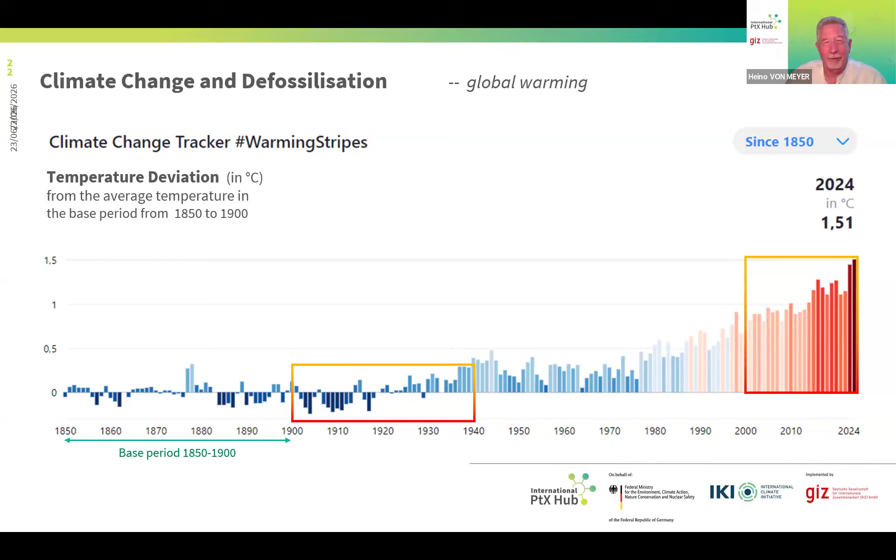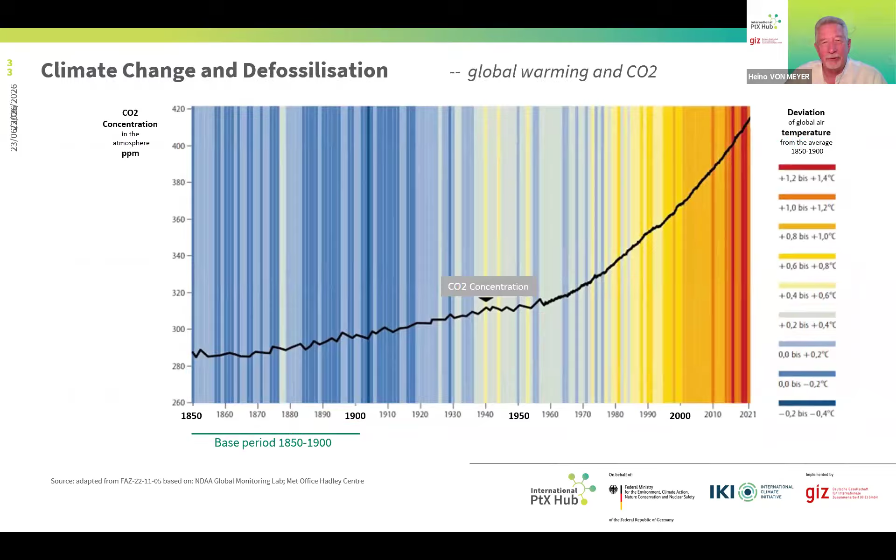clearly exceed this. We currently have unusual temperatures all over Europe. In Berlin, currently close to 35 degrees. So it's very unusual for our areas. And in France, they will have records today with more than 40 degrees. So that's the background. Obviously, this is correlated with an increasing concentration of CO2 in the atmosphere. And that's what we have to fight.

Let's look at which sectors contribute how much to the CO2 emissions. You see electricity and heat, so the power sector, industry and buildings. And transport is about a fifth, 22%. And the transport sector, if you split this up, then clearly road transport, cars and trucks, that's the main part. But aviation and shipping are in the order of 2.5 or 2.2%. You may say, oh, well, this is marginal. Well, 2.2% is equivalent to what the German emissions are. So it's worth addressing this. And therefore, let's look deeper into the maritime sector and shipping.

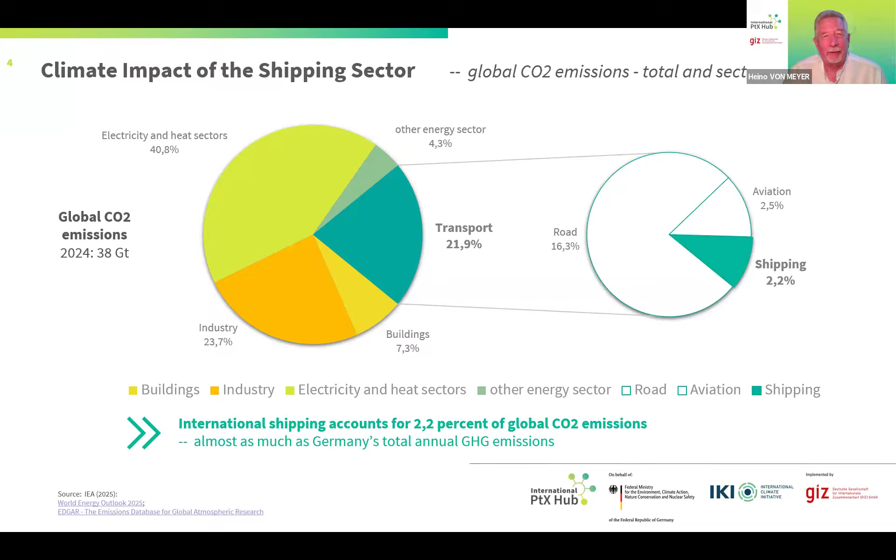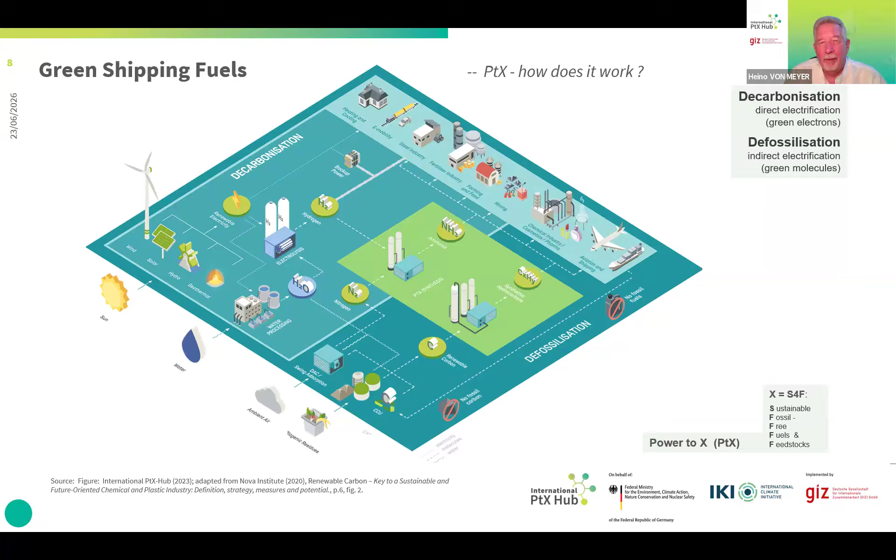Or the alternative is to combine the hydrogen with carbon and produce hydrocarbons. Now you will say, oh God, we wanted to get rid of carbon. Now you reintroduce carbon. So what's important is that this carbon stems from non-fossil renewable sources. You can think of direct air capture, but unfortunately, this is still very expensive and not yet fully ready. But biogenic residues are an option, and Argentina clearly is a country that probably has enough biogenic residues to provide renewable carbon. So that's also why we at the PtX Hub don't say decarbonization, but defossilization, because in the energy transition we will continue to need carbon, but it must be from non-fossil sources. Okay?

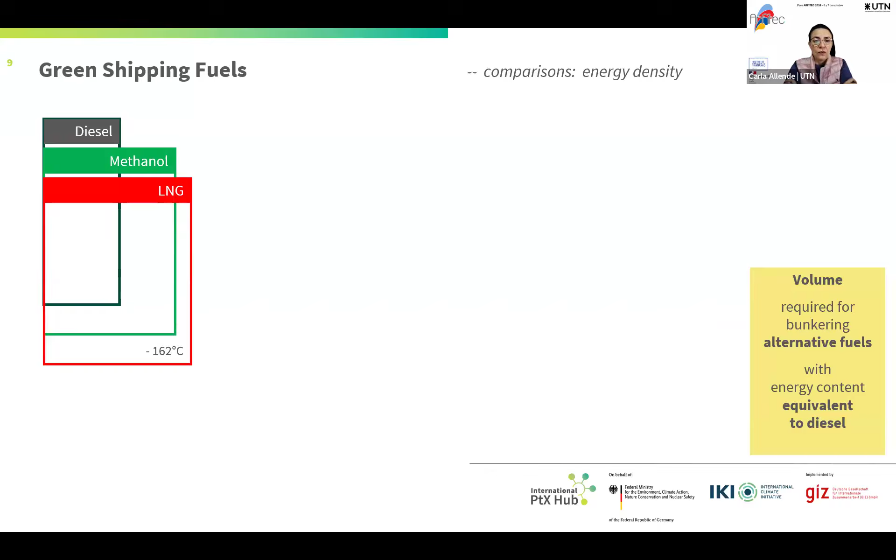Now, let's come to the shipping fuel side of it. If this is what you need in terms of volume for a diesel tank on your ship, if you go to methanol, you already need a tank that's almost twice as big. For LNG, that's currently used on many ships, you have to cool it down to minus 160 degrees Celsius. For ammonia, you also have to cool it down, but only to minus 34. But liquid hydrogen, if you liquefy the hydrogen in order to have it as a fuel, you need to cool it down to minus 250 degrees.

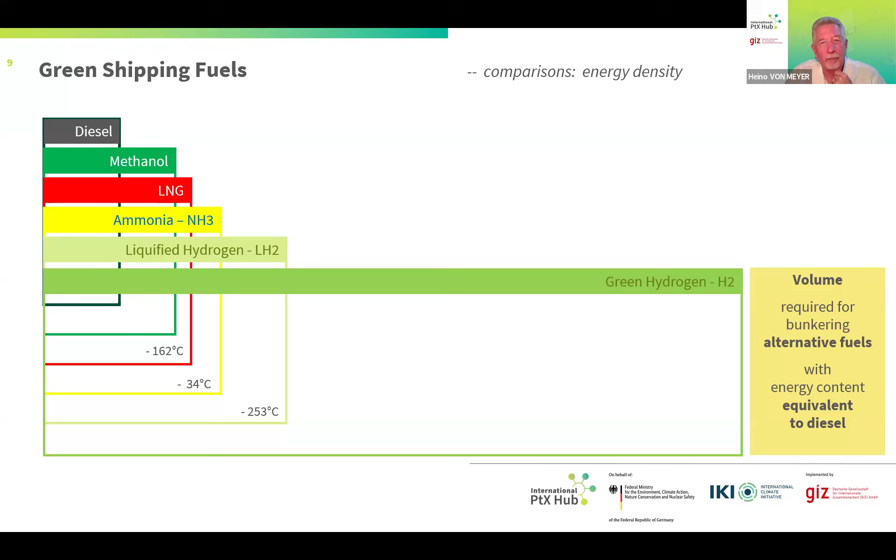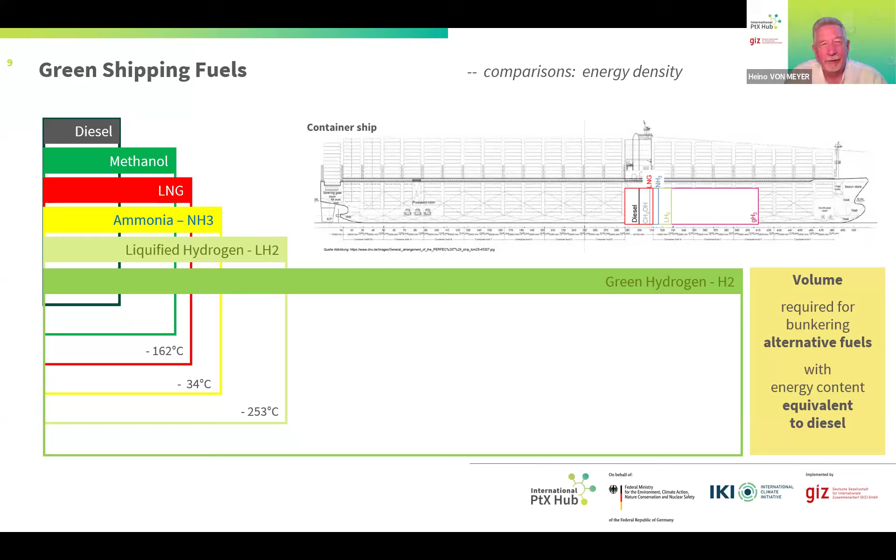And if you would try to use the hydrogen straight, then that's the volume needed. So 8 times or even more of what you need for a diesel tank. So in a ship, you see the diesel tank, and if you would have pure hydrogen, then you would lose a lot of your space for containers, etc. So basically, realistically, the choice is between methanol and ammonia.

Now, I will not go through all the different aspects comparing the different fuels, but as I already said, temperature for the liquid storage minus 250 degrees. For methanol, it is like with diesel, you can use it at ambient temperatures. Therefore, the compatibility with bunkering infrastructure in ports is rather or still low for hydrogen and e-ammonia. With methanol, that looks better. And I've talked about the storage size. It's 4 times, if it's liquid hydrogen, the amount you need for e-diesel.

The carbon sources are already mentioned. For hydrogen and ammonia, you don't need carbon sources, but for e-methanol and, for example, in some African countries who have high potentials for power to X because they have wind and sun, like Namibia or Mauritania, they have great difficulties to find carbon sources to match with the hydrogen. To some extent, I guess also Chile has that problem. A lot of wind and sun, but not so easy access to carbon sources. Brazil obviously has lots of carbon sources.

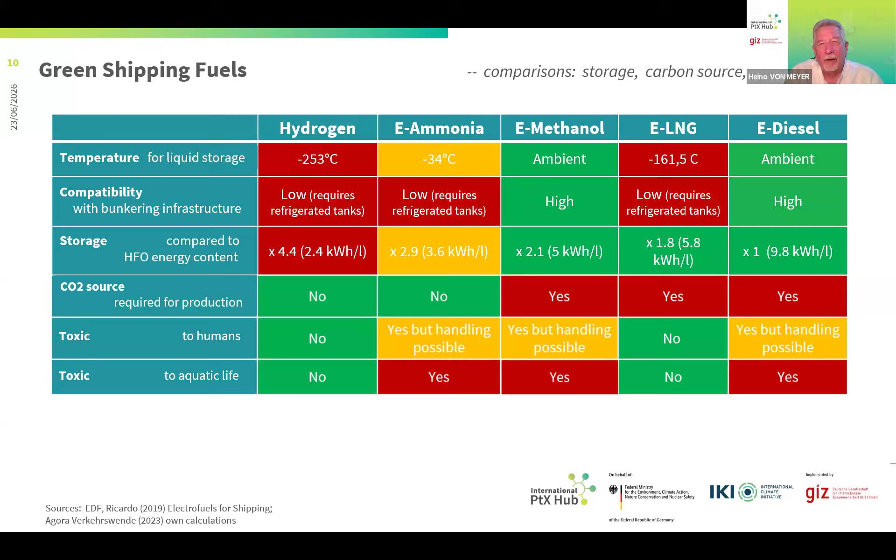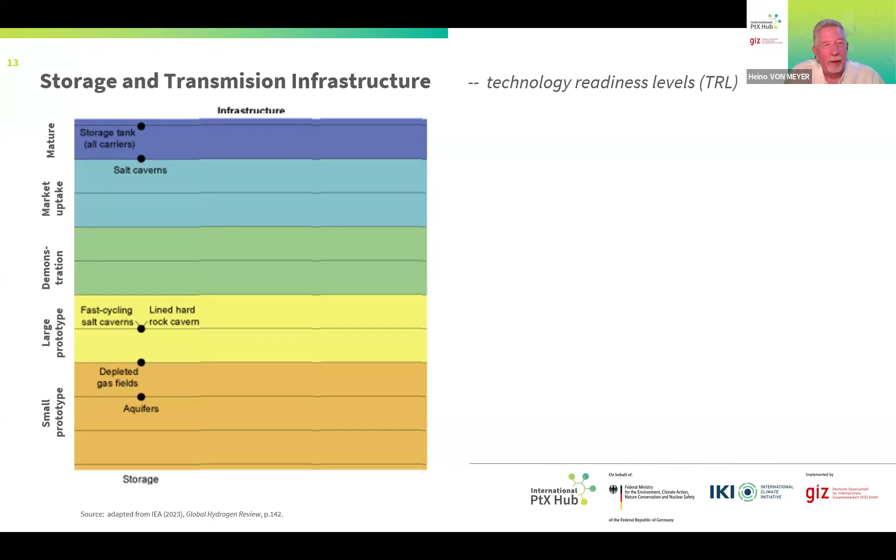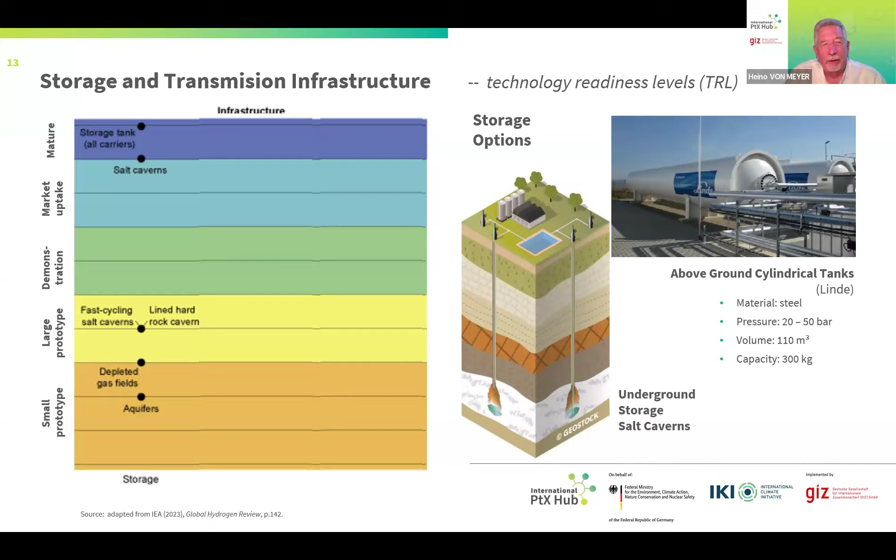Now, just a quick look at the infrastructure needs and how developed the technologies are. So the technology readiness levels here for storage. Storage tanks are already used, and for salt caverns, there are examples, but obviously not in every place. When it comes to more sophisticated storage in rock caverns or in depleted gas fields, etc., we're still at an early stage of technology development.

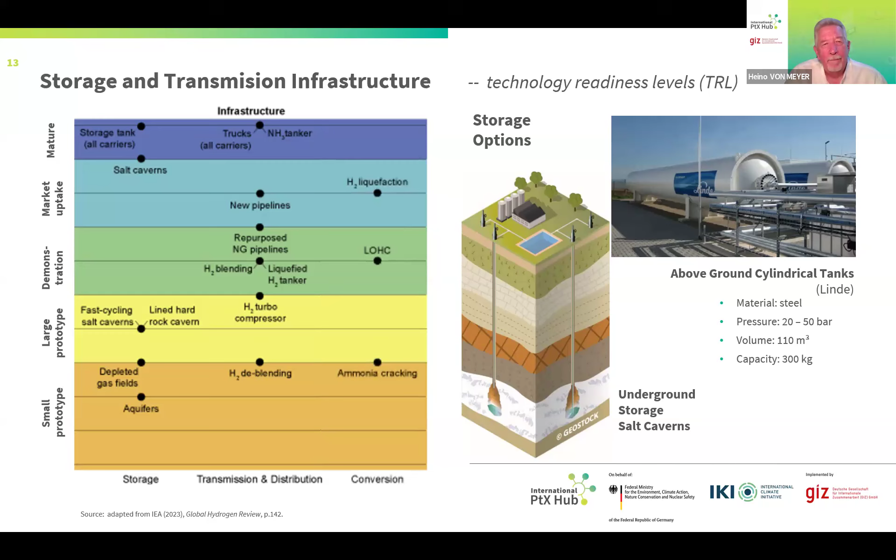For the transmission and distribution, trucks and ammonia tankers, they exist and are used. New pipelines, no problem, although hydrogen in pipelines requires higher standards. The repurposing of existing pipelines, therefore, is an issue because the hydrogen likes to escape. So, with that, that's just a quick overview on the technology readiness.

Let's have a look at the costs of transport. Now, for large amounts, these retrofitted or new pipelines are the cheapest options. You see the scale of prices here from below 10 dollar cents, and it goes up to more than $2 per kilo. Or if it's smaller amounts, the cheaper option is to go by truck.

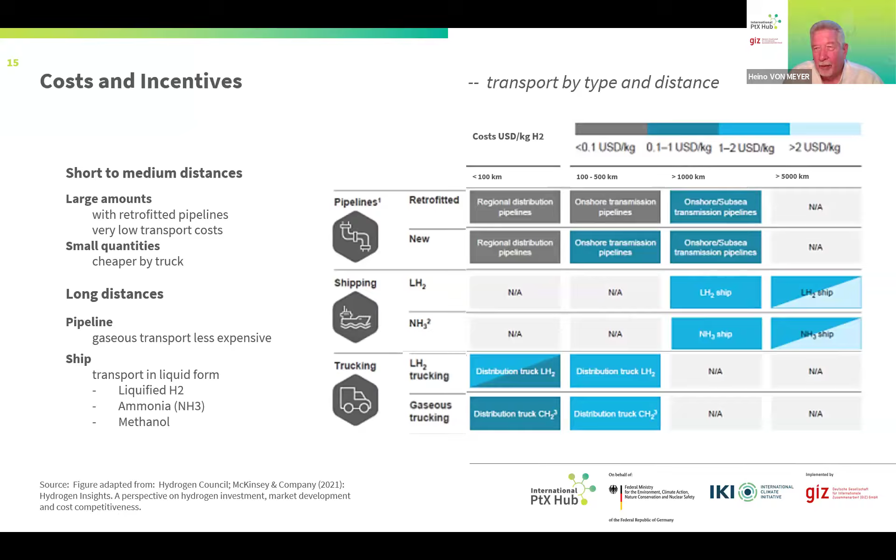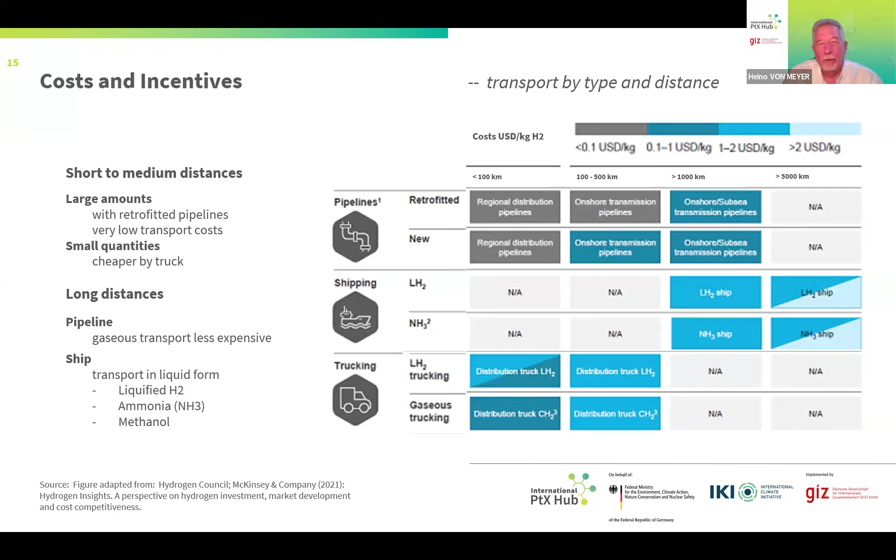For long distances, so distances beyond 1,000 kilometers or more, pipelines are an option, but probably not for Argentina. I mean, that's more the case for the Northern African countries, Morocco, Algeria, who have pipelines to Europe, and there are big discussions and projects to maybe connect North Africa with Europe on that. And the solution here is therefore shipping. Shipping either as liquefied hydrogen or ammonia, or it's not in this graphic, but also methanol. So it's a cost issue that changes with the distances to transport.

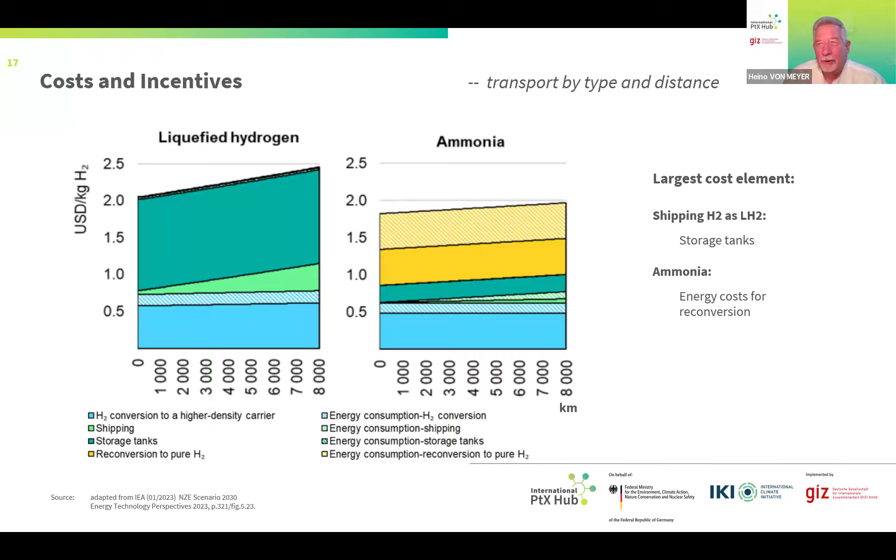I'm jumping into a different topic, and that is the costs and the incentives, because we will clearly see cost disadvantages for the new and alternative fuels, and therefore incentive mechanisms have been developed to bridge the gap between the supply price and the willingness to pay by off-takers. And the most famous one is currently H2Global, which is funded by the German Economic Ministry. And it works like this. There is a procurement auction where consortia can apply and offer a supply price for a 10-year period.

That's pretty long, but for investors, they would love to see 20 to 30 years security. But at least that's a first step. On the other side, you have a so-called offtake auction where the industries and transport sectors that want to buy PtX products or hydrogen can offer their willingness to pay, or off-taker price offers. And in the auction, the best options on both sides will be identified. And for sure, there will still be a price differential. And that will be covered with public money in the H2Global scheme.

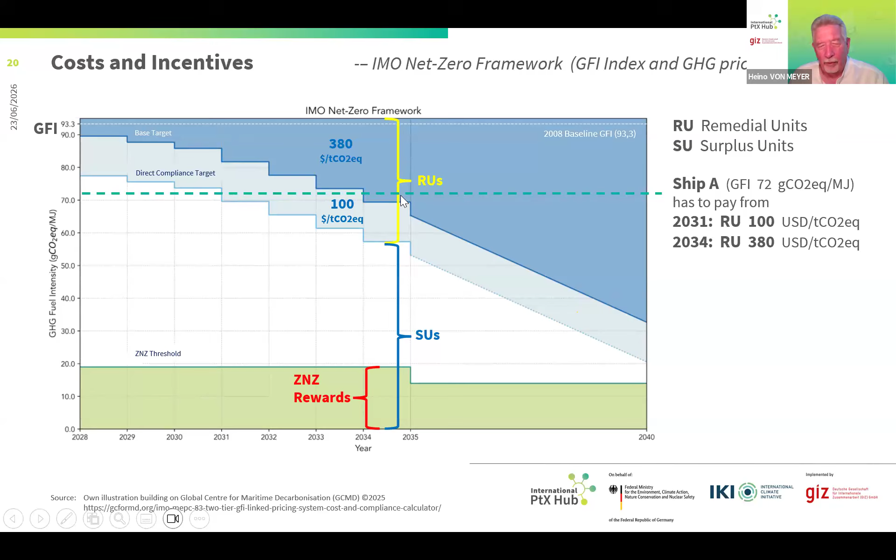So just to give an example, a ship that has a fuel intensity of 72: from 2031 on, they get into this gray area, they would have to pay 100, and from 2034 on, they would have to pay 380. Another ship can receive surplus units and can bank them for 2 years, or transfer and sell them to others who don't reach the thresholds.

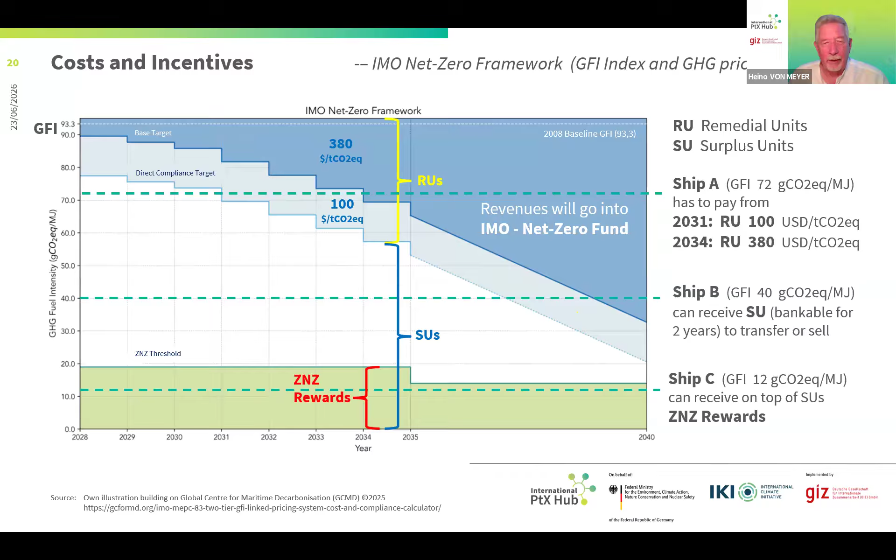And a modern green ammonia or methanol ship with a low fuel intensity can even get these rewards. Maybe a bit complicated, but that's interesting to look at because it would generate approximately 15 to 16 billion euros annually, and that's quite significant.

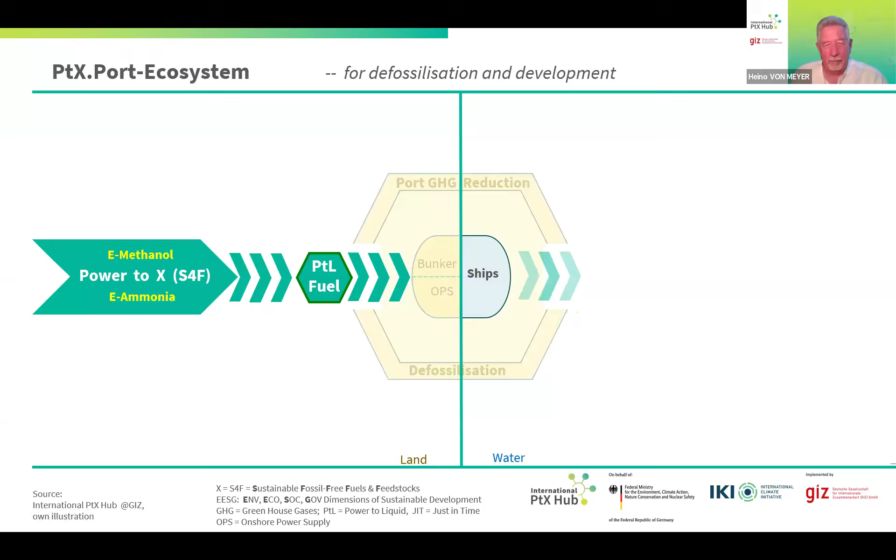Okay, I think I have to speed up a bit because I want to really get to the port story. This quickly, and you have probably seen this already, our EESG framework with the 4 dimensions and all the topics that should and need to be addressed. Now, what I want to show here is that the transformation of infrastructure and ports is more than just switching the fuel. So power to X, PtL fuels, and ships, that's already one story. We need new ships, new engines, etc., and that can be methanol or ammonia. But we also need to reduce the greenhouse gas emissions of the entire port.

So there is a defossilization agenda, which means you need onshore power supply so that the ships don't run their engines when in the harbor, but that they get electricity to run their machines. Particularly important for cruise ships. I don't know Buenos Aires, but in the Caribbean, where you have lots of cruise ships, if they run their engines, then it's a strong contribution to the pollution in these port towns. Therefore, in Europe, from, I don't know exactly, 31 or 32, ships will have to use onshore power supply in the ports. And obviously, the bunkering of fuels in the ports needs to be adjusted. We've seen the size of the bunkers plus the requirements to address toxicity, etc.

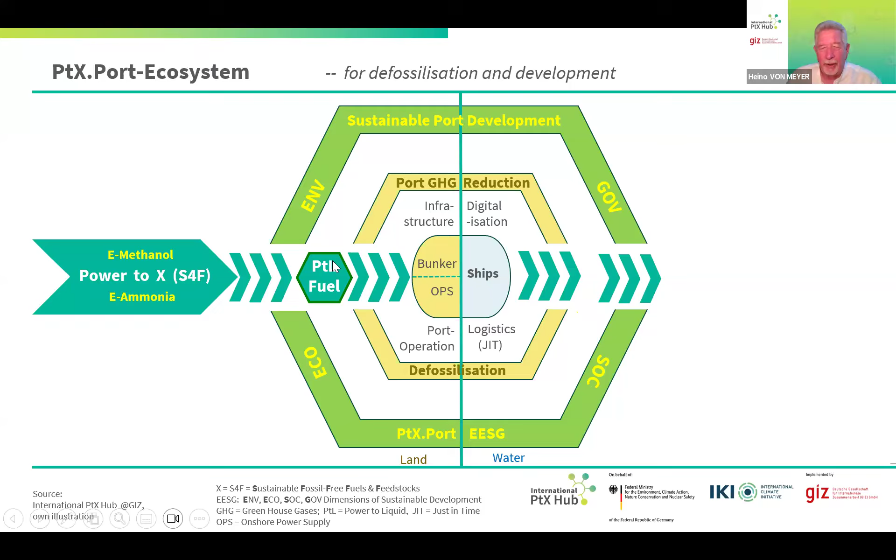So there is infrastructure needed and port operations need to be adjusted, and that will have to go hand in hand with the also needed digitalization of all the operations, both within the port as well as for ships coming in and out. So that is the defossilization agenda, but in practice, it really is a development agenda for ports. So sustainable port development is a broader issue and challenge and should reflect all the 4 dimensions. So that means an overall assessment of the port's development opportunities, where ports are not just points of entry and exit, but become platforms for integration of the various activities.

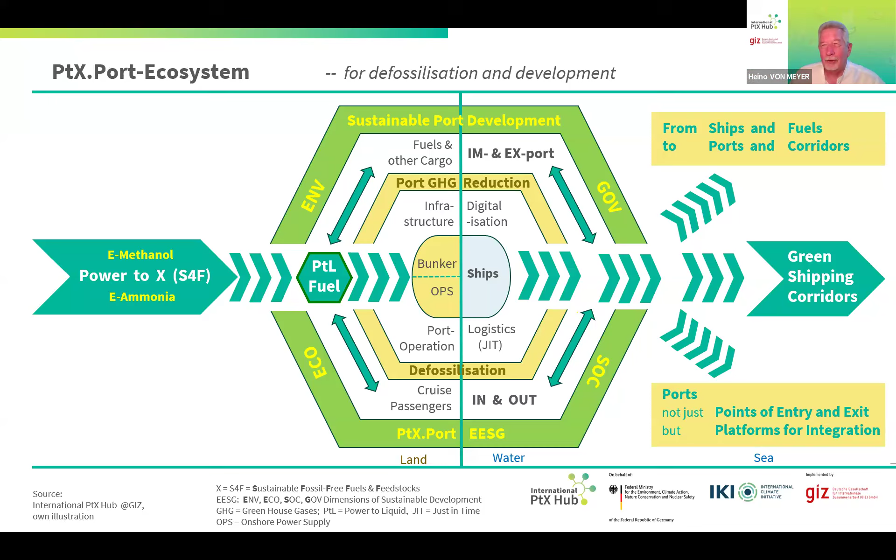So a shift also from the perspective on ships and fuels to ports and shipping corridors, because it's one thing to change the fuel in one port, it must also correspond in the receiving port where the ships go back and forth. And the port areas become also centers of renewable energy production, and also of industry clusters that locate there and use the renewable electricity, but also the PtX molecules. Plus, you have to also think about your hinterland connection with rail and road and coastal and inland shipping. Argentina is a wonderful case for how important also the inland shipping is, because imagine how long the ships go up the Paraná to Rosario, etc.

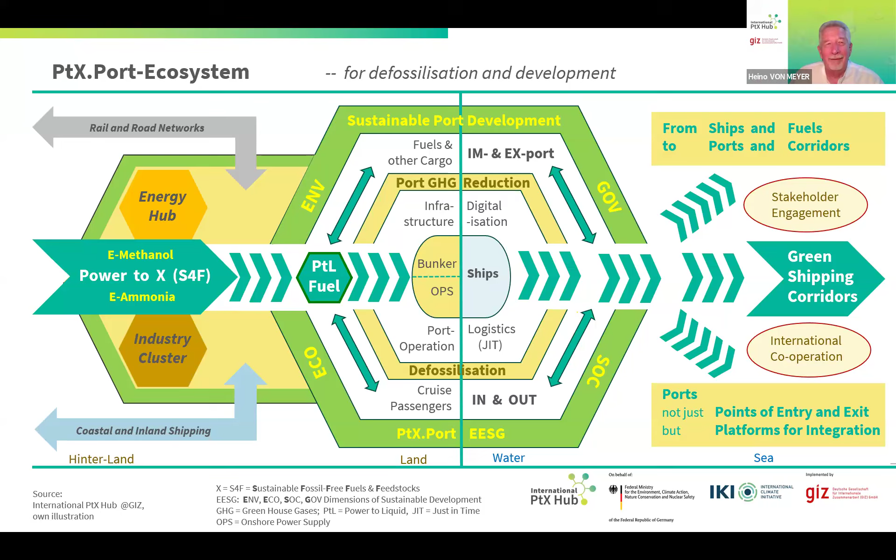So I'm actually currently in contact with a colleague from Rosario to look into what kind of lessons one can learn. And in Germany, most of the products go to Rotterdam in the Netherlands, and therefore Rotterdam seems to be the big port. But actually, it's the port where Germany receives the goods, and then they go up the Rhine River to Duisburg, which is the biggest European inland port. So thinking about the hinterland and the connection is important. Okay. When the Rhine has water. When the Rhine has water, very good point. It is becoming a serious issue. Yeah. The river Elbe, that is the port of Hamburg, they in recent years already had big issues.

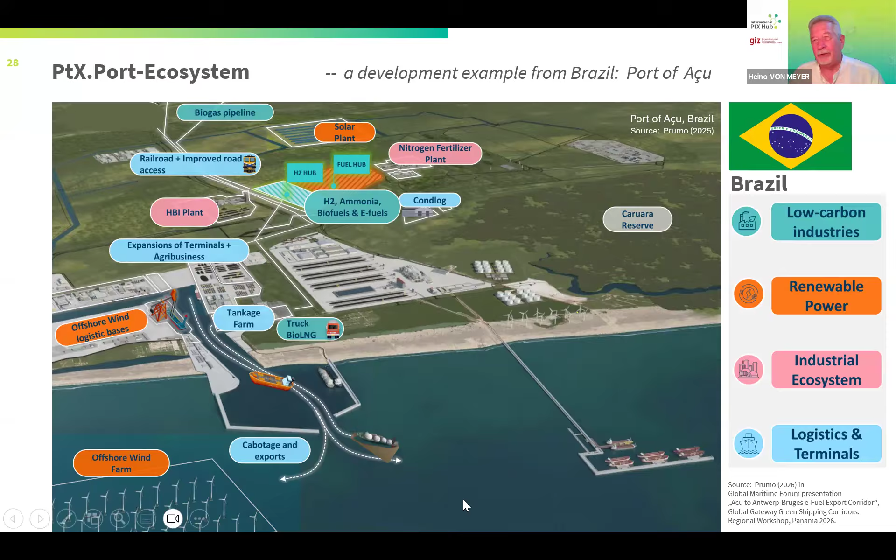Just a quick example of what I tried to put in the graph. The port of Açu in Brazil. Here you see the solar plants, the offshore wind park, and the low carbon industries for producing hydrogen, and the fuel hub, and then connected to that a nitrogen fertilizer plant and an HBI plant, which is hot briquetted iron, which is a first step in the green steel production. So once you have that cluster, the ports are not just, as I said, points of entry. And then obviously you need the connections, you need the railroads, you need the pipelines. So planning infrastructure development, that is the transformation of the energy, is an impetus to broader economic development.

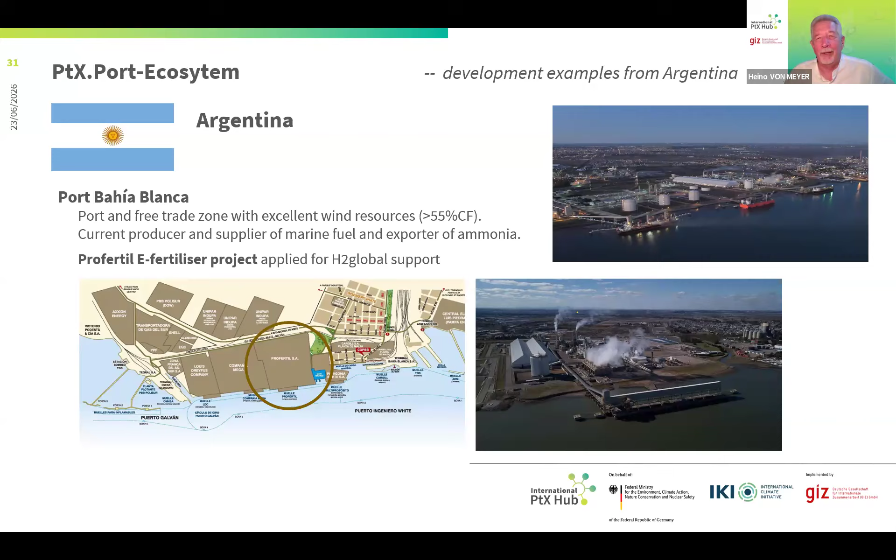I tried to look up an Argentinian example. I already mentioned the port of Bahía Blanca, which is a free trade area, which makes it easier, has excellent wind resources, and is currently already a producer and provider of marine fuels and exporting ammonia, gray ammonia so far. But there is the Profertil e-fertilizer project, and that actually applied for H2Global support. I need to find out if they were successful or not. But you see here the location of the plant. So it's also very closely integrated. And other ports, such as Comodoro Rivadavia, they have plans for extending their port area with a perspective towards hydrogen and power to X.

Also, the Dock Sud in Buenos Aires, etc., has clearly potentials for retrofitting. So I guess you are more familiar with these things.

One important thing I would still like to get across. A lot of countries started with, okay, Europe wants hydrogen because they need green molecules. We have wind and sun, let's produce hydrogen and export it. It was very much an export-driven logic, which neglected the chances for value added in your own country and how to create jobs and income in your own countries.

Because if you have hydrogen, already for transport reasons, you will probably go for ammonia. Once you have ammonia, as you see, it can be used in trade and logistics as a fuel, or you produce fertilizer. You get independent of Russian imports, and you can export it then still with higher value and use the fertilizer in your own country to improve food production and export food, which Argentina has a long tradition.